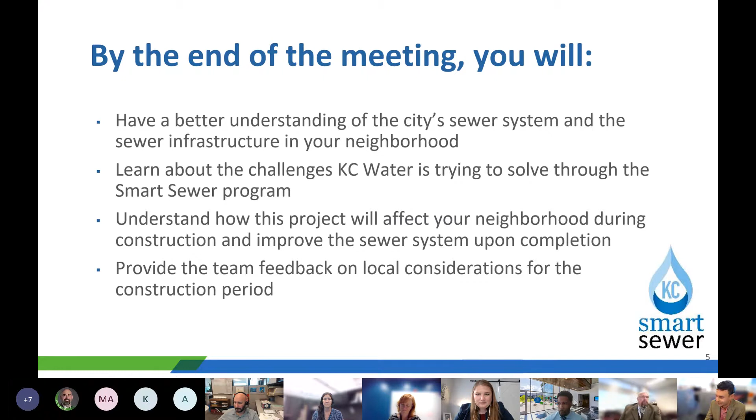And like I was saying, to start framing the meeting, we hope you get a better understanding of the infrastructure in your neighborhood, learn about some of the program challenges the Smart Sewer program's hoping to solve, understand how this project specifically will affect your neighborhood, and then provide feedback on some of the considerations your community has during the construction period. So with that, I'll turn it over to Brian Hess, who's already made a huge impact on this meeting by getting the slides going.

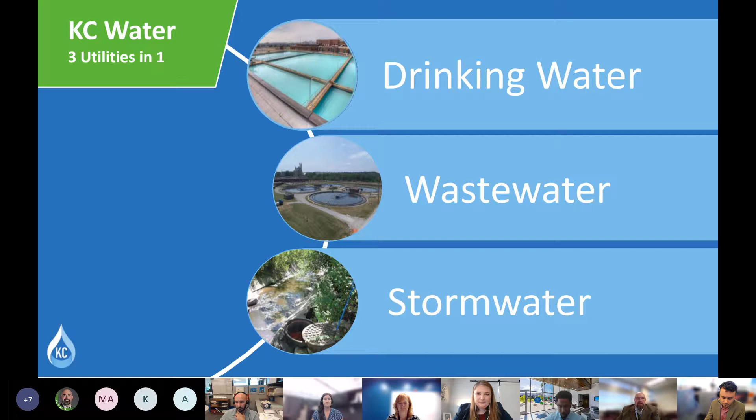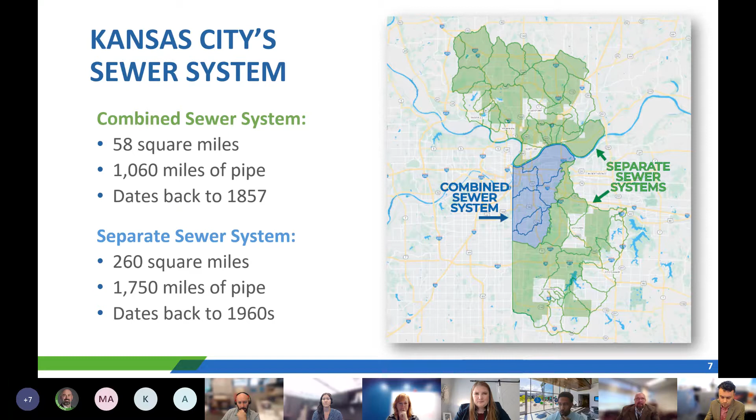Outside of that, the separate sewer systems cover about 260 square miles. So the majority of our systems, 1,750 miles of pipe, and those systems date back to the 1960s. They were separate. So what that means is the wastewater that is collected in those systems goes directly to the wastewater treatment plants. In the combined systems, they are collecting both wastewater and stormwater. And the next slide here gives us a little bit of an understanding of what that means.

So in the combined system, how this works is that the house and or business is connected to the combined wastewater and stormwater system. So that carries both wastewater and also the stormwater within our system. The part of town that was constructed early on used the same pipes to make this conveyance system. So as we get stormwater and wastewater combined in this system, the lower flows of wastewater only, what we call dry weather flows, actually are routed to the wastewater treatment plant.

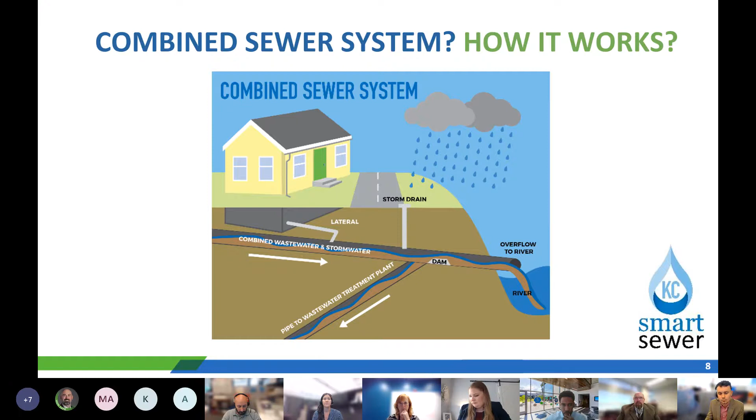But when we have larger rain events or rain events that meet certain parameters within those systems that would create an overflow, those then tend to overflow and would go to a river or stream, which would cause some of that wastewater to get diluted, but also get into our waterway system.

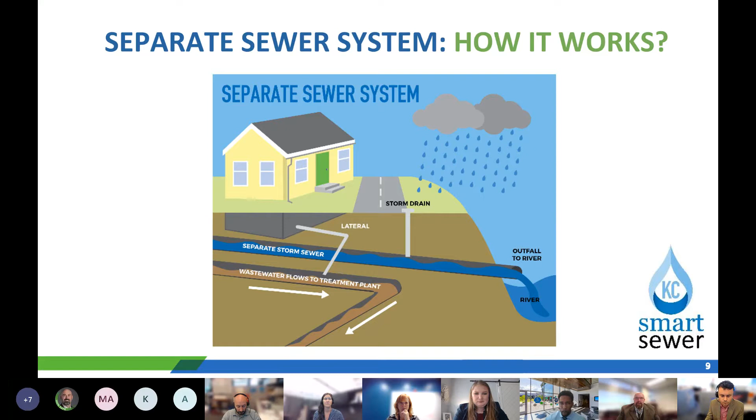Next slide. So the separate sewer system, which is the newer system, is separated into stormwater flows that capture that stormwater and take it directly to the rivers and creeks. And then the wastewater system is separated so that that flow only goes to our treatment facilities. So they are indeed separated between those two systems. Next slide.

So some of the challenges that we have as it relates to these systems: we have both combined and separate sewer systems, but we do have overflows that can occur during wet weather, as we showed on that slide. Those systems are combined, and therefore when we do have wet weather flow, there is that tendency to have wastewater that will exit the system instead of going to treatment.

The aging infrastructure: we have, as you saw, 1860s pipe systems in place. A lot of them are brick and deteriorating and obviously need to be updated and upgraded. We can have sewer backups as it relates to some of these issues with the aging structures and the way things operate. And then, of course, poor water quality can result from those overflows and combinations of flows being sent to those rivers, streams, and lakes.

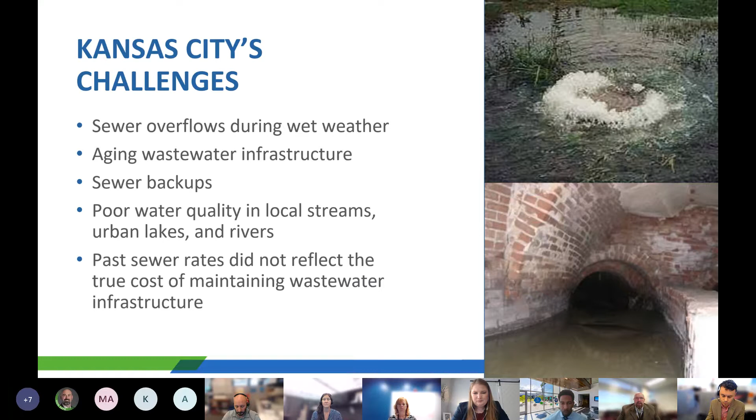The rates that we had previously or historically have not been able to keep up with the need for replacement and upgrading of these systems. And we have, within the Smart Sewer program, put together a program that will go out to 2035 and beyond to address a lot of these issues. Next slide, please.

So the Smart Sewer program, we have many planned improvements. This is the program that's been set up as a result of the consent decree that EPA has with Kansas City. And recently we were able to refine that program and put together, with our latest modification of that consent decree, the program that will allow us to move forward out to 2035 and beyond in order to implement improvements that will help alleviate some of these water quality issues that we can run into with combined systems.

So we have green infrastructure that we will be putting in place in a number of different areas within our system to be able to capture and slow down and treat some of that runoff that would otherwise inundate our combined system. We plan on separating sewers. This project's one of those that fall into that type of category. We'll be improving our sewer capacities, which will be enlarging pipes and parallel pipes and so forth, newer systems.

Inflow and infiltration reduction, that's improvements that we do to help alleviate getting wet weather flows through and into our separate sewer systems that result in reductions in capacity at our treatment plant. So the pump station and treatment plant upgrades and improvements help to capture and gather some of that flow that we can't always keep up with at this point.

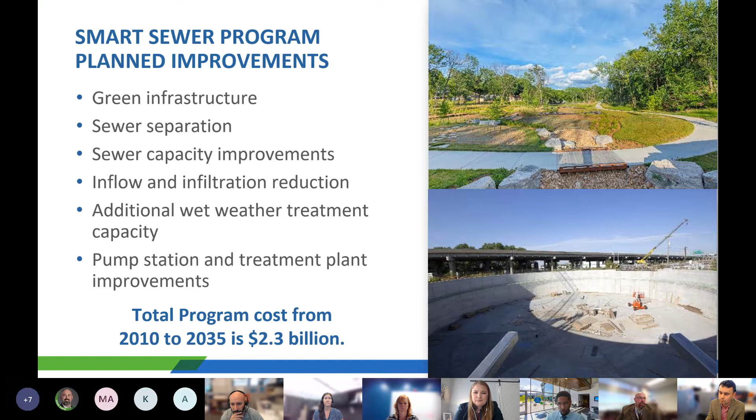Our total program, at this point through 2035, is estimated to cost about $2.3 billion. So a lot of improvements that will need to be in place and that we're working on diligently. Next slide, please. So as we implement this program, you can see we have in the combined sewer system a lot of different types of projects that we're trying to put into place.

Green infrastructure, sewer separation, and others, just jumped ahead, there you go, are types of projects that throughout our systems will help prevent those wet weather overflows, reduce the number that we have, and then help us get to the water quality benefits that we want to have in place, where the streams and rivers and such are much cleaner.

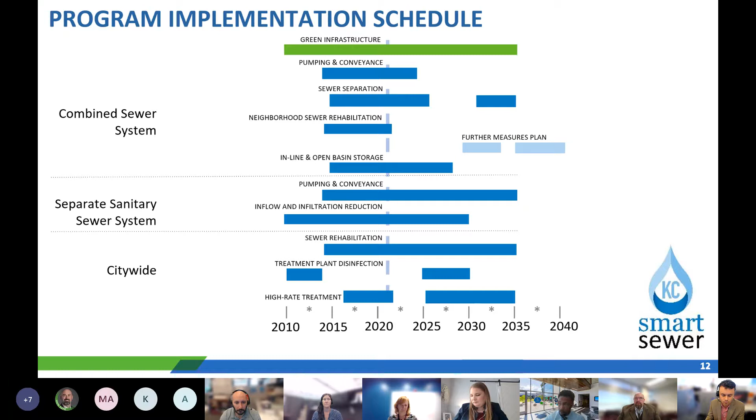In 2030, we'll be looking at further measures plans, what we have done up to that point, and understand what we do beyond 2035 and any changes that we need to make in order to use the most up-to-date technologies or the best solutions that we found through our history to this point, and then be able to implement these things cost effectively. Next slide. I think that gets us into our 15th Street pump station upgrade and sewer separation project.

Willie Williams is our project manager on that. So at this point, I'll go ahead and turn it over to you, Willie. Sure. Thanks, Brian. So the 15th Street pump stations and sewer separation project is in line with what Brian talked about. It's a combined sewer project, and the goal is to separate sewers in the area, all in an effort to reduce the chances of a combined sewer overflow.

And so the reason why this project is named 15th Street Pump Station Upgrade and Sewer Separation: originally we were considering two options. The first option was, are we going to do a pump station upgrade? So there's a pump station down under the Truman Road Viaduct at about 15th and Crystal. And so we were considering upgrading that pump station, or increasing its capacity, to be able to handle more flow and therefore pump that to the treatment plant instead of having that increased flow just go out to the river.

So we compared that to the cost effectiveness of actually doing sewer separation in the area, and we decided to go that route of doing sewer separation. So the area of this project, you can kind of see from this diagram, there's Truman Road right there. It pretty much goes from Bennington. Bennington's pretty much its most western boundary, down to the Blue River to the east, to the right of the screen. You can kind of see where the Blue River is, just along Truman Road.

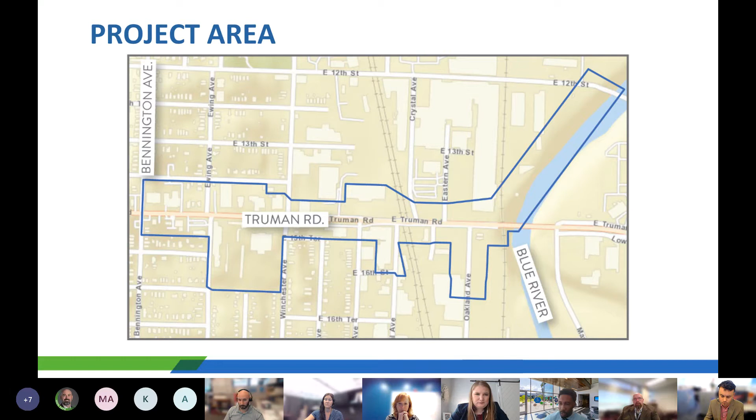In the other area here on Truman Road, we're going to separate our sewers, and we're going to have new storm sewers, and we're also going to do some rehab work to some of the sanitary sewer system in that area as well. Next slide, please.

Also, what's not shown on here, or at least it's not indicated, there's also some private flow that currently goes into the existing combined sewer system, which we're not removing on this project. But there's a Keep Out the Rain portion of the Smart Sewer program, I don't think Brian mentioned that, that will be coming back at some point soon, I think. And with that, it'll be more separation, pretty much disconnecting illicit connections, and that'll be further separation that will happen in this area. Next slide, please.

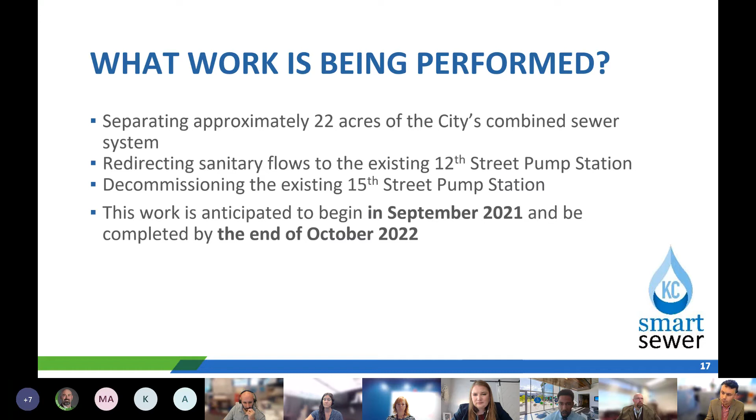Hopefully, maybe we'll get done before then, who knows? But that's our project schedule for now. And like I said, we'll try to do our best to get it done as fast and efficiently as possible to just kind of get out of the way. Next slide, please.

And so community benefits. So Brian definitely touched on this. What sewer separation does, it improves the stormwater collection and conveyance. So during those big storm events, we're going to have an actual sewer system that can convey those and reduce the likelihood of ponding that may happen in the street. I know Truman Road's got a pretty steep grade going from west to east, so there probably isn't much ponding there, but if there was any, this will help improve some of it.

Also improve the reliability of the water distribution system. That kind of goes into some similar thing with the stormwater conveyance and also just conveying sanitary flow. This project will help the reliability of the system. We're going to be doing some rehab to the existing sewer that's there now that will eventually be the sanitary sewer exclusively. And so that will increase the reliability there.

Also, we're going to plant some streetscape, which we'll talk a little bit more about. It's kind of a green infrastructure component that I think is pretty neat. It'll certainly bring some beauty to the area. And finally, the ultimate goal here, it improves water quality of the local streams by reducing the chances of combined sewer overflows. So that's what we're kind of marching towards with the program, and this certainly helps by doing this project.

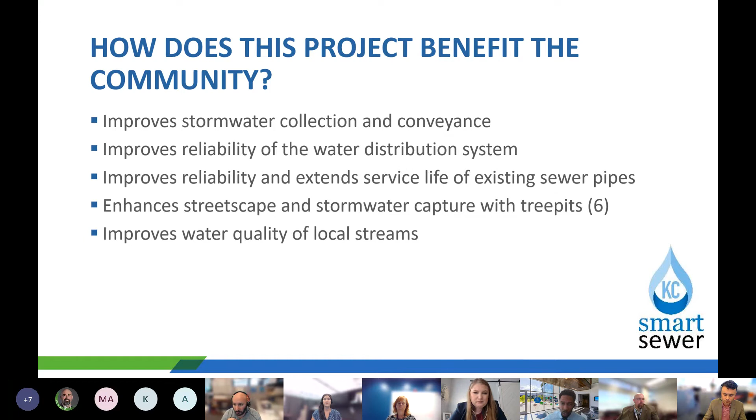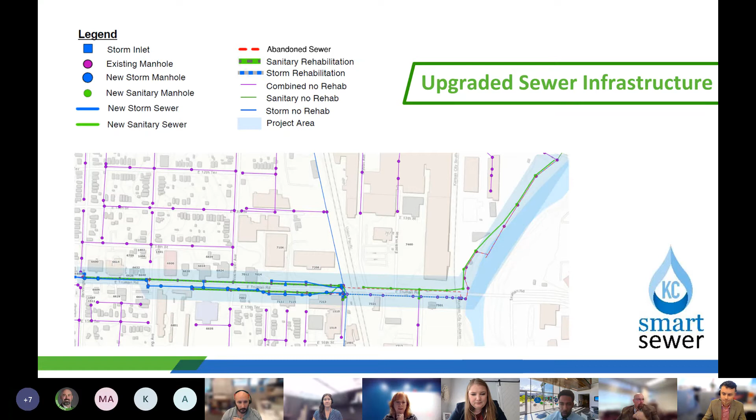Next slide, please. And so for this slide, Colleen Connor, the design professional with GBA, is on, and she's going to discuss some of the upgraded sewer infrastructure that will be happening. Thanks, Willie. I think everybody's really touched on the overall project and what we're going to accomplish here. So you can see the blue shading again indicating the project area, and then the blue lines indicate the new storm sewer that will be installed.

So at Bennington there in front of the fire station, the new storm sewer is on the north side of the street, and then at Ewing we cross over, and then new storm sewer on the south side of the street. Once we get down to the viaduct, we have storm sewer on both sides of that viaduct because we didn't want to cross through the big retaining wall that is there. It's hard to tell in there, but there's a little diagonal line just west of the UP Railroad that shows some new sanitary sewer that will be installed as part of this project on the west side of those railroad tracks.

And then we jump over to the east side of the UP Railroad tracks, and what was once the combined sewer 30-inch pipe that goes out to the river, it will be disconnected from the sanitary sewer as we had indicated, and it will be only storm sewer then going to the river. And then on the north side of the street, we'll be having the new sanitary sewer installed along Truman Road, and then it'll go diagonal along the Blue River up to the 12th Street pump station, as Willie had indicated.

And then it's a little bit hard to see in the figure, but along with the new storm sewer and the new sanitary sewer, there is also some rehabilitation of the existing sewer that's there to give it a longer life for the neighborhood. And of course, the decommissioning of the pump station there at the river, and abandonment of the existing force main that goes back to the interceptor sewer. I think that captures everything. Go ahead to the next slide.

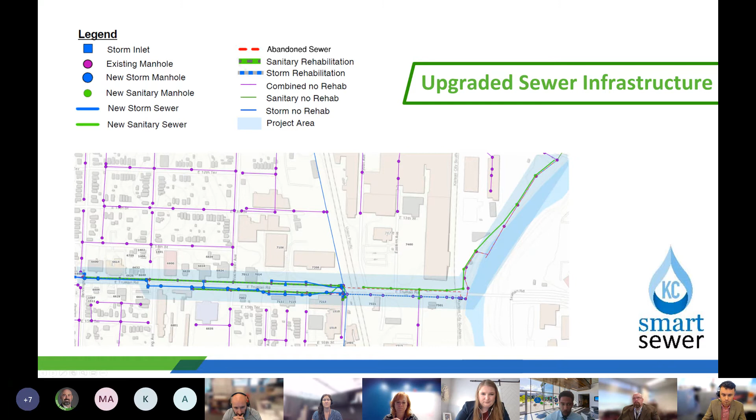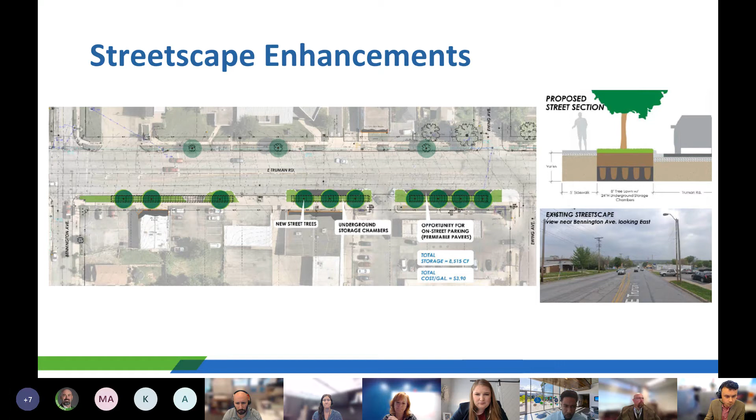And then also, as Willie and others had mentioned, we have the streetscape enhancements just to improve the water quality in the area and improve some storm sewer capture, where we are adding in these tree pits along Truman Road from Bennington down to Ewing. So those will incorporate underground chambers that help filter the storm water coming in, and then they will also be connected to the new storm sewer. Next slide.

So, sure, yeah, I'll take this one back. So also on the presentation is Chris and Mike Akins with She Digs It, and they are the construction contractor that's been selected and given notice to proceed, and they're going to touch on what you can expect during construction.

Yeah, this is Mike. As they've shown on the slide, we are going to have large equipment in the area. There's going to be a lot of trucks coming in, trucks coming out. It's going to be noisy. We're going to handle the dust to the best of our ability, but there will be a little bit of dust involved in it. There will be temporary lane closures.

Crossing the intersections on Truman Road is going to be a little bit touchy, as well as the ramps that go down under the viaduct. We'll probably have to have flaggers in some portions of the work to get everybody in and out. We don't plan on having anyone shut out where they can't get into their businesses for any substantial length of time. I know that there are one or two businesses that will have to have a temporary entrance built for them to get in while we're doing the construction that needs to be done. And really, there shouldn't be any major sewer disruptions. We'll be bypass pumping where we can.

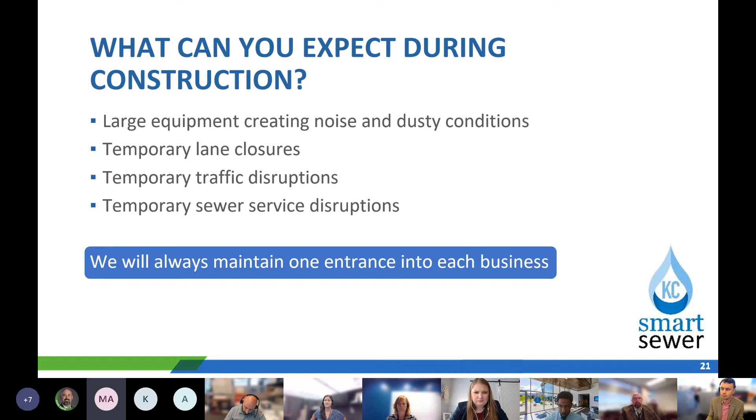Okay, next slide. Thanks, Mike. And what I can tell you guys about Mike, he's the man when it comes to fixing emergency repairs. So if something does happen, we've got the best guy to do that. So it's good for us.

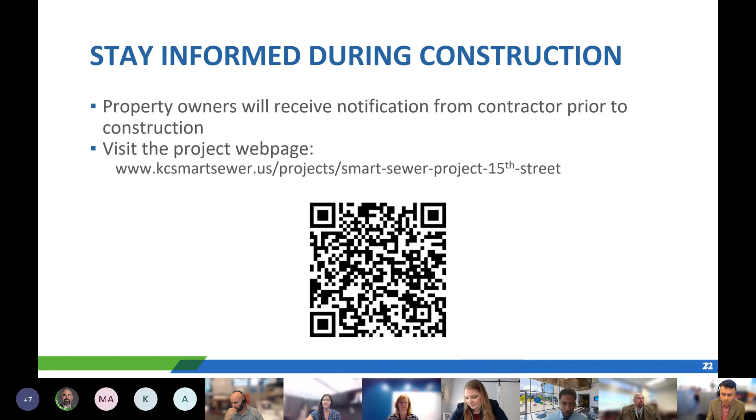Going forward, so you will be able to stay informed during construction: property owners, as we've indicated, we will make sure you are getting notifications from the contractor prior to construction in your specific area. And also we have this web page that our public outreach team has done a wonderful job building that you can access with the QR code there, or you can just use the link that is provided. Next slide, please.

Yes, indeed. Absolutely. So we're going to do our best to keep any issues at a minimum and get out of your way as soon as possible. Like Mike indicated, it is construction and we understand that it is inconvenient, but ultimately this is for the betterment of Kansas City, and for this project specifically, your neighborhood. So again, we're happy to be doing this work, and we have confidence that we will do this successfully.

All right. Thanks, Willie. Well, with that, we have a little bit of time for discussion and questions. I didn't see any in the chat during the meeting, but if you do have any questions at this point, please unmute yourself and feel free to ask the team. All right, then I'll start with a question for the attendees. Are there any ways that you'd want to hear about this project as we go forward? What's the best way to keep you all updated on the project?